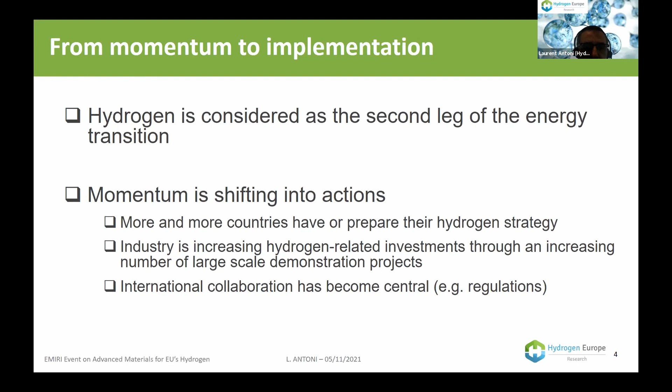And why? If you look at the net zero emission scenario from the IEA, you see that from today to 2050, the demand for hydrogen should grow sixfold. And just by 2030, it should double, which means from a little less than 100 million tons, we should go to 200 million tons of hydrogen. And so how to produce that hydrogen?

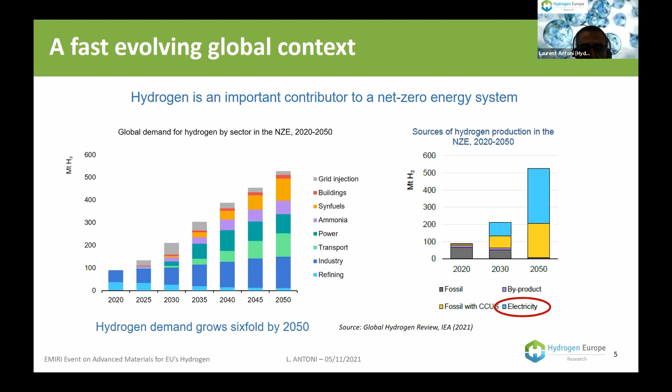On the right-hand side, you see that in the future, as also mentioned by Hélène, we need to use electricity, as much as possible renewable electricity, but in order to produce low carbon and renewable hydrogen, we may also use low carbon electricity. Producing hydrogen with electricity means we need to develop electrolyzers with higher efficiency, lower cost, higher durability. So here there is a real need for innovation in electrolysis on the system side, but also on the material side.

So the main achievements of R&I on hydrogen. Here we must say that if today Europe is strong on hydrogen, we really have to thank the long-term vision of the European Commission. Here you see on that graph the budget devoted by the European Commission to support the development of hydrogen and fuel cells over time, since the 90s.

And you see it's increasing in each of the framework programmes, and the next one will be 1,000. So it is a long-term vision that the European Commission had, and now also with some member states' support to further develop hydrogen.

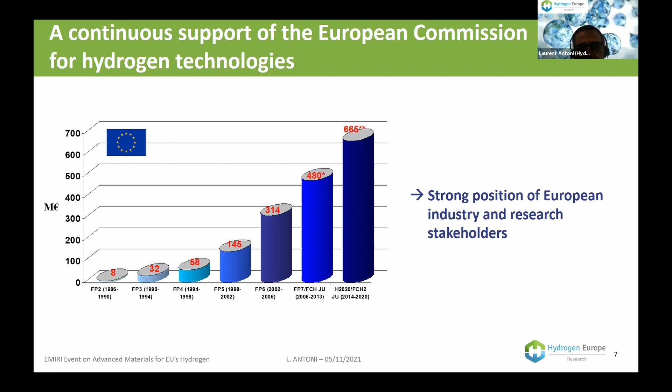And the outcome of FCH1 and 2: almost 2 billion, 1 billion coming from the Commission, 1 billion in kind from the private members, and the private members are industry, the association Hydrogen Europe, an industry grouping with more than 250 members today, and Hydrogen Europe Research, which I have the honor to chair, a research grouping with almost 100 members today.

And so this is a little different from EMIRI, as mentioned by Philippe at the beginning. On the hydrogen side, we have two associations, one gathering all the industry and national associations, and the other one gathering all the research actors.

And this is also quite specific to our JU. The research community is directly a member of the governing board of the JU with the Commission, which means there is a direct link between the Commission, the industry, and the research. And this really is helpful in order to have really dynamic discussions, and we can also take right and quick decisions.

And regarding the topics of the JU, it covers the whole value chain. On the right-hand side, you can see the share between mobility and energy, which is almost the same, a little more than 40%, and 6% on cross-cutting activities, which are very important. Cross-cutting means education, but also safety, regulation, codes and standards, and communication.

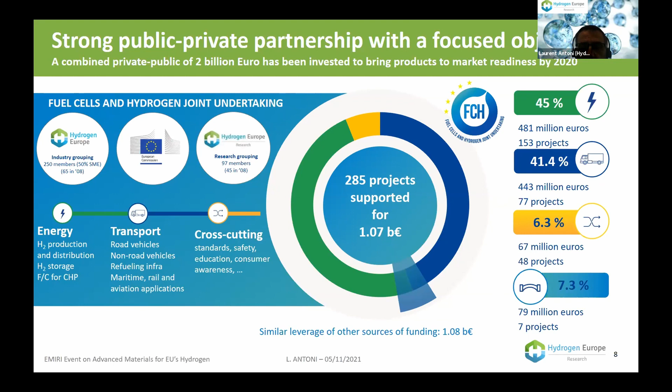And finally, the bridge: these are the so-called overarching projects, which are also sometimes called valleys. We have some projects covering the whole value chain. We wanted to see from the beginning what could be some hydrogen ecosystems, how they could work, and what could be the outcome of this kind of ecosystem on hydrogen.

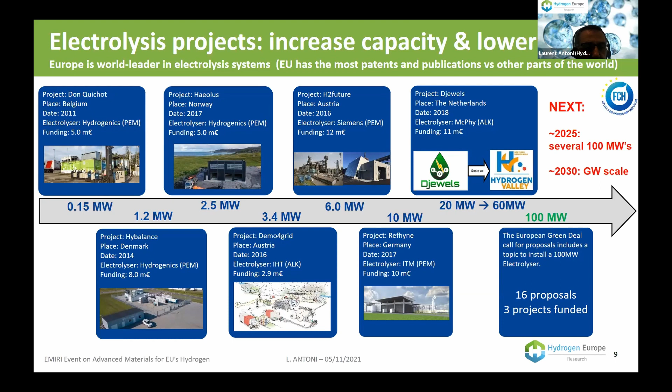And just to show quickly what has been done, 10 years ago, we were happy to have an electrolyzer of 0.15 megawatts. And now we are starting 10, 20 megawatt electrolyzers. And even with the last Green Deal call, we now start projects developing 100 megawatt electrolyzers. You see, just 1,000 times higher than 10 years ago. Very nice achievements.

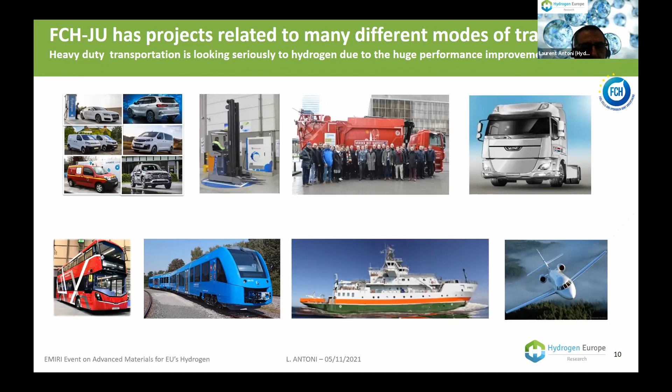Regarding transport, more and more applications on transport have been developed using hydrogen technologies. I won't go through everything, but you see all the pictures, owing to the support of European projects, but also on stationary. On stationary, we are speaking less about that. Of course, it's less trendy than it can be in Japan, where they sold almost 400,000 fuel cell systems since 2011. But at European level, we also had some projects leading to cheaper, more durable, and more efficient stationary fuel cell systems.

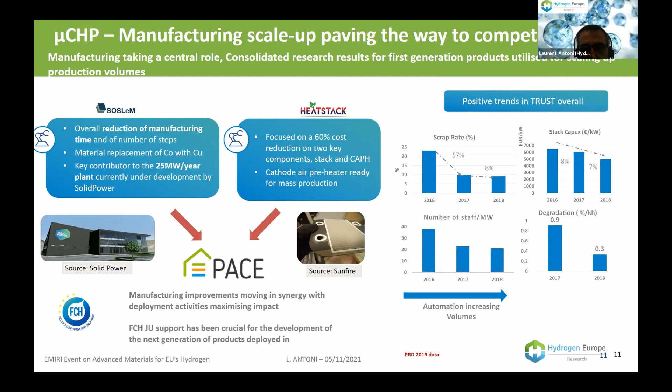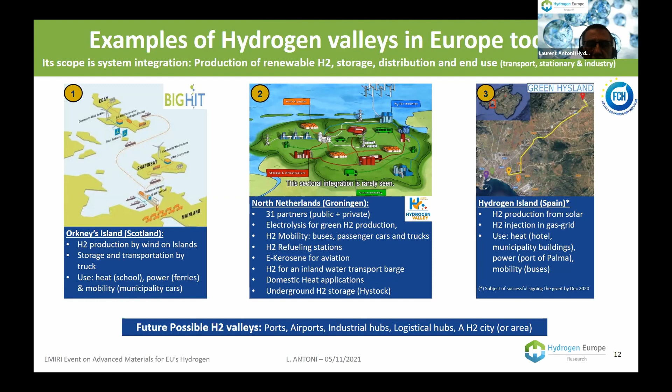And here are just some examples of these ecosystems I was mentioning 1 minute ago. We have 3 ones in Scotland, in the Netherlands, and the new one in Spain, where we are covering the whole ecosystem from production to usage, with distribution and usages for transport, for stationary, or for energy applications. This is very useful to see what could be the hydrogen economy in the future.

And now what about hydrogen in Horizon Europe and the raw materials? Ellen has already mentioned the next Clean Hydrogen JU, but I would also like to show here the role of research. Even if we can now see that hydrogen technologies become mature and are industrialized, this means that we also have to increase the research support.

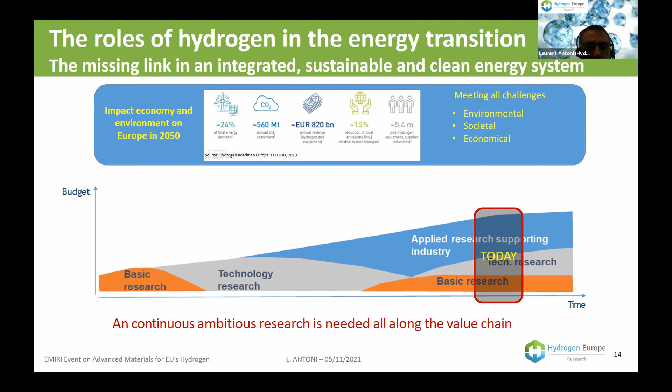Following the graph, you can see that today we are really in the area where we are ready to go to market. Of course, there is a strong effort regarding applied research for industry, but we still need basic research, and basic research will then move into technological research and prepare the next and second next generation of products. Just one example, I was speaking some minutes ago about the Japanese fuel cell systems. Today, they are at their 8th generation of products since 2010. So we really need ambitious and continuous research all along the value chain.

And that's exactly what Hydrogen Europe Research is aiming at. As mentioned, we are today about 100 members, shared between research organizations and higher education establishments like universities, present in 20 EU member states, but in total, with associate countries, about 26 European countries, which is great, and we should have some more during our next General Assembly on the 1st of December.

And our role is to tackle technological challenges, of course, research business as usual in order to increase technology readiness levels. But also now, as mentioned, we want to go to gigawatt scale factories, which means that we also have to progress in the manufacturing readiness level. And here we need to help industry directly on their production lines, but also, as Ellen mentioned previously, we need very strong European hydrogen laboratories and European infrastructure, which can then really support the development of pilot plants and production plants at the European level.

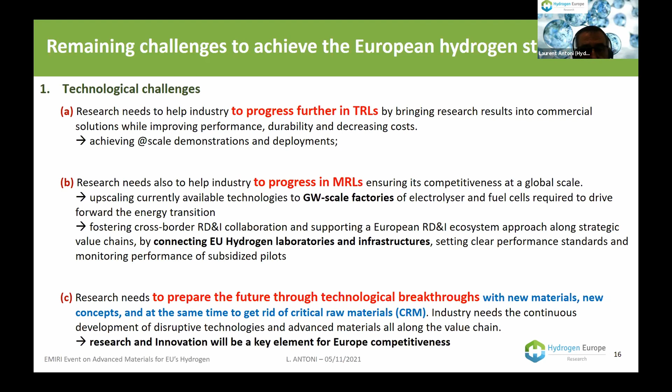And finally, as researchers, we also need to prepare basic research, so breakthrough technologies. And this means new materials, new concepts, new architectures, and getting rid as much as possible of all critical raw materials.

And we also need to work on societal challenges, education, training, skills. We need, of course, to work on that, but if we want hydrogen to be developed, we need also to work on better community stakeholders' knowledge and acceptance. Acceptance, which means safety, but also market transparency.

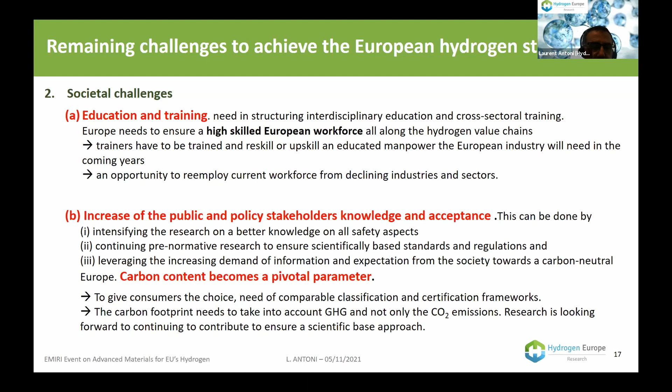And here, all these life cycle and sustainability assessments become more and more important, as we really need to prove that the hydrogen we are producing and using is really beneficial for the environment and also for the economy. And that's what we will try to do during the next Clean Hydrogen Joint Undertaking. I would say the same members, the two private members, Hydrogen Europe Industry, Hydrogen Europe Research, and the European Commission.

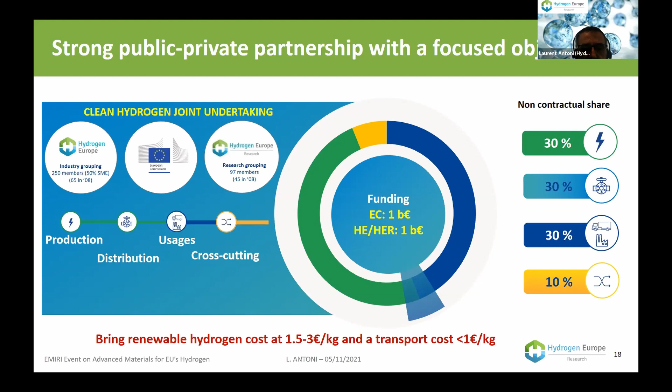And the budget has been increased. We will have 2 billion, 1 billion from the Commission and 1 billion from the private members. And our, I would say, main target is really to achieve renewable hydrogen costs between 1.5 and 3 euros a kilogram, and to have a transport cost less than 1 euro per kilogram.

And as mentioned by Helen, we are not the only one working on hydrogen. We also have some synergies with other partnerships on the application side. But regarding the three pillars that we now have: hydrogen production, where we really need to produce massively renewable hydrogen, distribution by either pipes or by other means of transport, and usages, which are on the transport side and on the industry side.

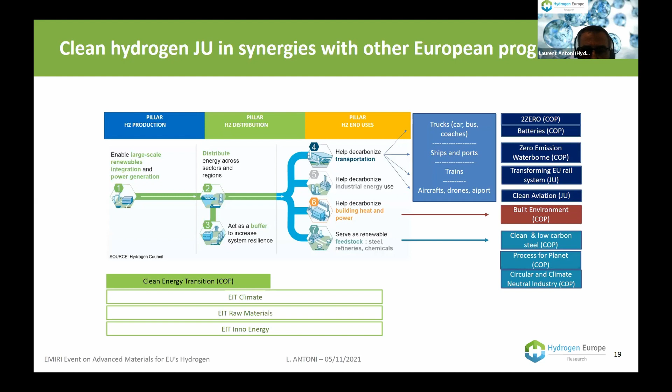We have some building blocks which will cover any kind of hydrogen transportation, but then we will focus on heavy duty vehicles, on maritime, on aviation, and on rail. I would say fuel cell cars could be considered as almost industrial. And now we really need to focus where hydrogen has most of the benefit. And on the industry side, we have to continue to work on stationary fuel cells and also on hydrogen turbines and burners in connection with processes for application.

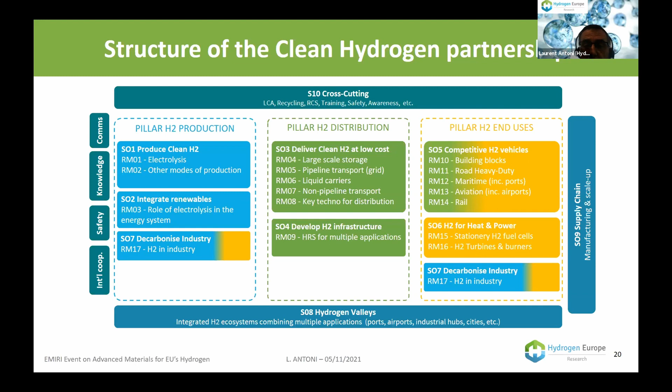And just to show you one example of what we call technology roadmaps that we have developed under our own strategic research and innovation agenda, released 2 years ago now to prepare the Clean Hydrogen JU, you see that from now to 2030. This was a common work between industry and research, gathering, I think, almost 400 people to work on all these different roadmaps. We put some targets and some numbers to achieve and different interim targets from 2020 to 2030.

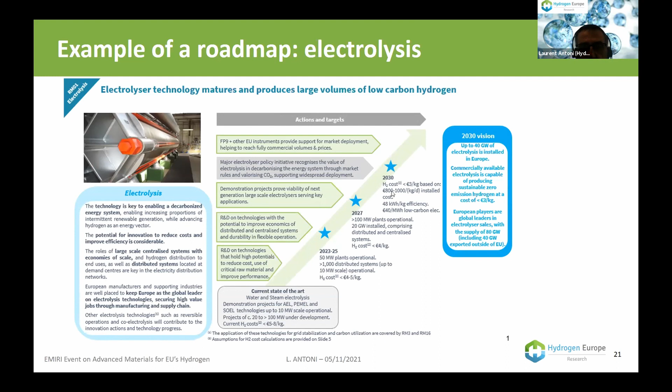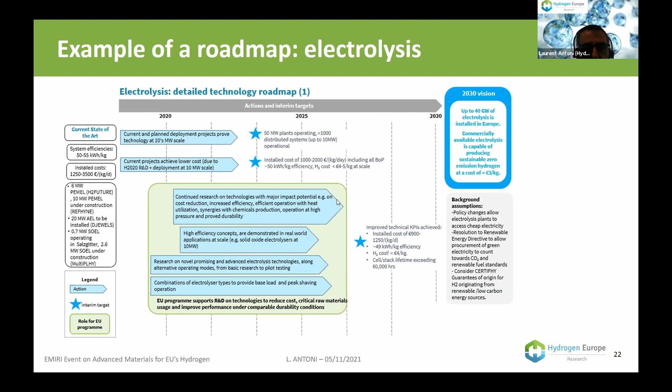And then we break down this macroscopic roadmap into more actions, as you can see here, and the actions which could be funded by European programs. And from this, we then had some really specific actions which should be taken during the Clean Hydrogen Joint Undertaking, at different levels: early stage research, basic research if you prefer, RIA, research and innovation actions, and after, innovation actions and flagship projects.

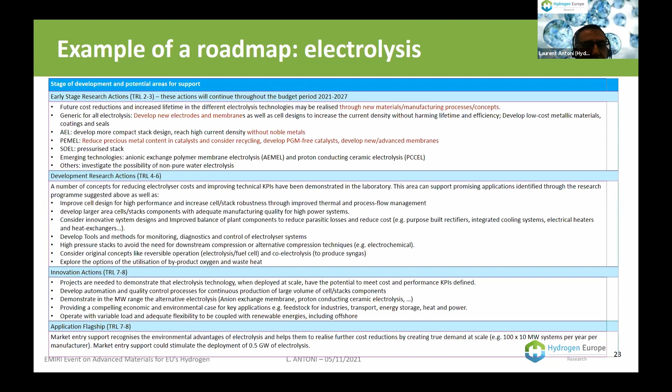And here I just put in red, for this example of electrolysis, activities, potential future projects dealing with materials. And at the basic research level, you see there are quite some topics we will have to work on during the next JU. And then if we focus just on materials, here are some topics where we really are looking for new materials.

As mentioned at the beginning, we need to decrease or even avoid the use of PGM, platinum group metal catalysts, in electrolyzers and fuel cells. It's costly, but also it has some carbon footprint impact. So if we reduce them, we are working in both good directions.

But we also need to reduce the usage of critical raw materials or even critical materials which are not only raw, like for instance PFAS, the perfluorosulfonic acid, which are used to build our membranes, for both electrolyzers and fuel cells. And there is today a proposal to avoid the usage at the European level.

And this can just kill, I would say, all our hydrogen domain if we can no longer use this kind of membrane, because there is no other solution available today. But that doesn't mean that we do not have to work to see if we can find another one.

And then advanced materials for hydrogen storage, and in particular carbon fibers for storage, for tanks. Of course, we can work on polymers for the container, but then, in order to reduce the content of carbon fibers in your tank, which can represent more than half of the cost of your tank, we need very high mechanical strength carbon fibers to be developed.

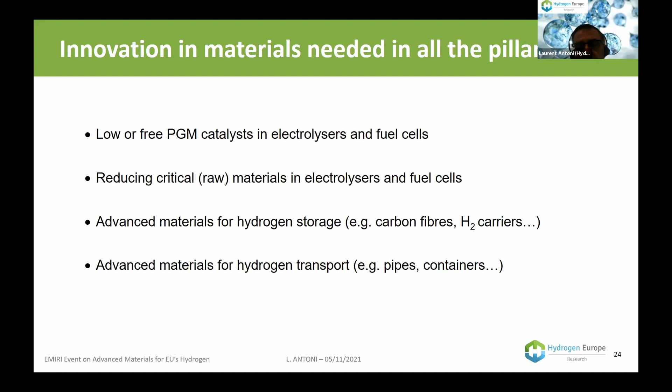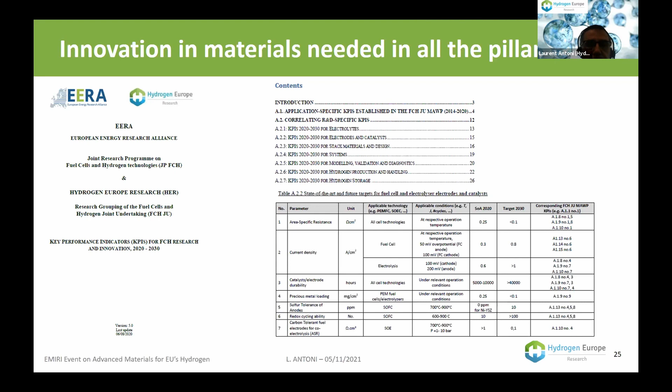So in conclusion, I would say that, as already mentioned by Hélène, hydrogen is a priority in Europe, and Europe has published a very ambitious hydrogen strategy, and with the alliance, that now we have to achieve. And we have to acknowledge that owing to the strong public-private partnership, FCH1, FCH2, Europe today is really one of the leading regions regarding hydrogen at the research level and at the industry level. But this has to be continued, in particular at the research level, owing to the new Clean Hydrogen Joint Undertaking.

And as a research association, we have to work in very close collaboration with the European industry in order to ensure that what we're developing is really useful for the European industry, in order for the industry to be the leader in hydrogen technologies. And as part of innovation, materials are really part of that. And from that perspective, Hydrogen Europe Research really welcomes a closer collaboration with the EMIRI association.

And with that, I would like to thank you for your attention. Thank you so much, Laurent. All live from the airport, so we sympathize with you.

I think it was a very rich presentation. If I take your presentation and Hélène's together, they contain, I would say, the substance of everything that is happening in Europe. I don't see a question in the Q&A for the moment, but maybe just one question for the sake of time. We do a lot in Europe, and there are very strong competencies. But there is also a lot going on in South Korea and Japan, for example. How do you see the possibility to use the European framework to engage in cross Europe-Japan/Korea collaborations? Is there a way to do that today?